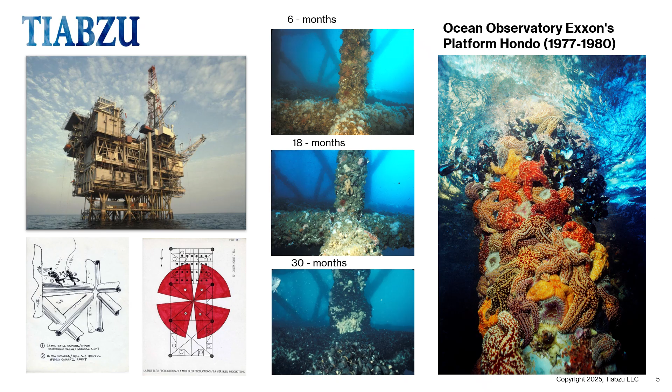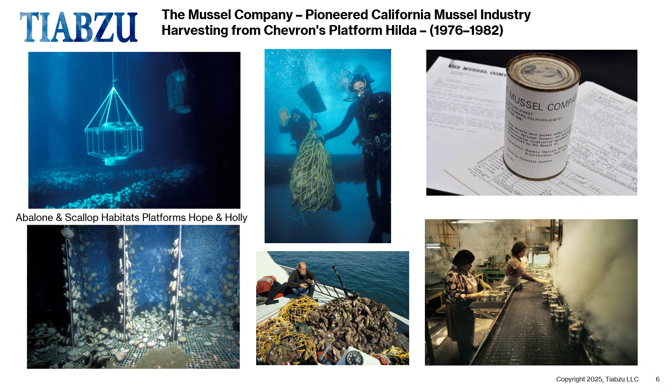Watching a reef form over time lapse, we could add up the benefits of this valuable resource. In 1983, with a Saltonstall-Kennedy matching grant from NOAA, my team, the Mussel Company, successfully harvested and canned mussels, demonstrating the commercial viability of repurposing offshore infrastructure for aquaculture. Atlantic Richfield funded Man-Made Oasis, a multimedia presentation showcased at the Cabrillo Marine Aquarium in Los Angeles for decades. It introduced the world to offshore platforms as artificial reefs, sparking new perspectives on their ecological benefits and alternative uses.

In 2015, Santa Barbara was in the midst of a severe drought. I was reading about the restart of the local community desal plant. I understood the process and its history.

I wondered, why not operate subsea and use the natural pressure of the ocean for desalination? This would reduce energy demands and the environmental impact.

As much as 40% of the energy costs for desalination is not only for reverse osmosis, but also to power the high-pressure, high-flow pumps that move as much as 5 times the amount of seawater as freshwater through intake and pretreatment. Pre-osmotic filtering removes marine life and coastal particulate matter from the seawater.

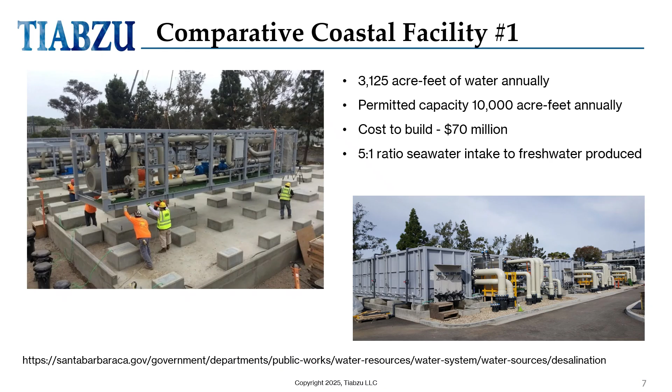The residual brine concentrate is not only saline-rich, but also includes the remains of this biomass. This biochemical cocktail is discharged back into sensitive coastal waters. Phytoplankton is among the marine life entrained by intake and impacted by brine discharge.

Phytoplankton concentrates along coastal zones. It is the base of the aquatic food chain and a primary source of more than half of the oxygen on the planet, releasing more O2 than all plants on land combined.

Phytoplankton also absorbs CO2, which is delivered to the deep ocean depths when the life that feeds upon the carbon-rich phytoplankton descends. This is part of diel vertical migration, a natural carbon sequestration that cycles from surface to a depth of 900 feet every 24 hours.

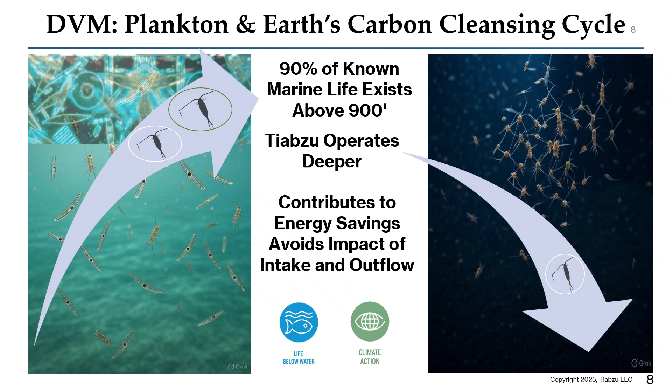DVM is a planetary climate regulating process that can be adversely impacted by nearshore seawater intake and discharge.

Operating subsea, high-pressure, high-flow pumps are required only for delivery of purified water from depth to surface or shore. Pumping only the product, the purified water, and not the product source, the seawater, lowers overall energy requirements by as much as 40%. Contributing to energy savings is removing multi-pump pre-osmosis by operating below the ocean's most biologically productive zone.

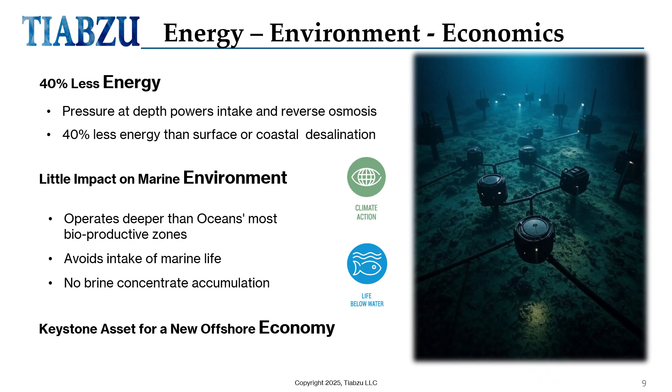Contemplated depths avoid the impact of desalination on phytoplankton, the marine carbon cycle, and potential negative feedback on climate perturbation that these systems can cause.

And no one wants one of these obstructing the ocean view from their Malibu estate.

Approximately 50% of the implementation costs for the Carlsbad, California facility is attributed to the regulatory process and mitigation efforts. NIMBY delays implementation for years and chalks up hundreds of millions in front-end costs.

The assumption is that the removal of the environmental impacts from intake and discharge, as well as competition with high-value coastal real estate, will lower that price tag.

We pulled in our favorite engineer, Ryan Elliott. We hired a team of process, structural, mechanical, chemical, and reverse osmosis engineers at IDI in Knoxville, Tennessee, to design the Tiabzu system.

Hi, I'm Ryan Elliott, mechanical ocean engineer, diver, and licensed professional engineer. I began working with Bob and Suzanne on various projects while in commercial dive school and continued while studying mechanical engineering at Cal Poly San Luis Obispo.

Our collaborations continued after graduation while I worked for other companies on various ocean engineering projects, including subsea power infrastructure, ocean observatories, and subsea sensors for the United States, the United Nations Nuclear Test Ban Treaty Organization, and other customers.

I also participated in the installation of these projects as a diver, deckhand, or equipment operator, in addition to the engineering, testing, and equipment assembly phases, giving valuable field experience to incorporate into subsequent designs.

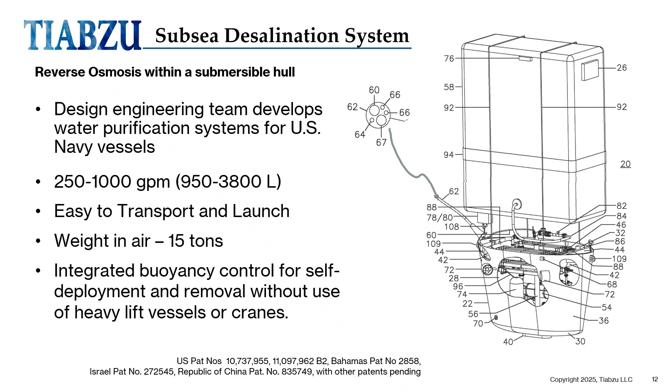This buoyancy system integration is used to facilitate deployment, recovery for maintenance or at end of life, or to position and maintain it at operational depth during mobile operations. For scaled water harvesting fields, the module keel will mate with subsea infrastructure.

The Tiabzu system includes an integrated buoyancy control system analogous to a hot air balloon. Using difference in density between hot internal air and cool external air for its lift, its balloon or bladder provides lift using the approximate 3% difference in relative density between the RO water and seawater. RO water buoyancy allows safe vertical movement of subsea objects without change in lifting force with depth associated with gas-based methods where buoyant force varies with changes in pressure.

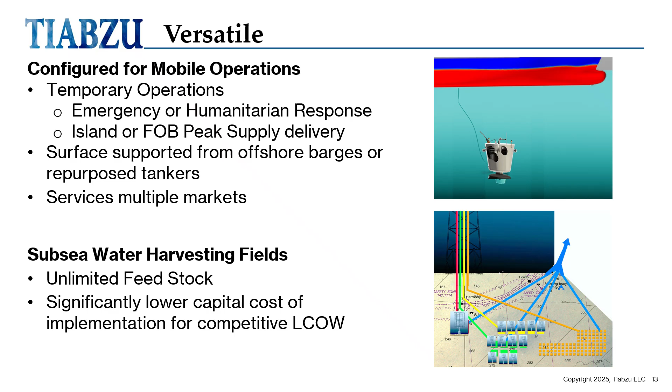I'm Dr. Andrea Neal. I'm the president and founder of Blue Capital. I met Bob and Suzanne back in the day when I was working with Jean-Michel Cousteau and working heavily as a scientific diver. Over the last 20 years, I've led major expeditions across the Atlantic and the Pacific and throughout the Sargasso Sea, as well as accomplished many feats in the waste-to-energy industry, including large-scale industrial production of waste-to-energy facilities.

Today, we're going to go through some of the things about Tiabzu, objectives, pilot scale, and replication of the project. The plan is to deploy a commercial scale system next to a platform and conduct a pilot for a minimum of 6 months to confirm predicted operational efficiencies, energy, environmental, and economic outcomes to de-risk the project for financing and performance insurance. This de-risking step allows for easier project finance capacity for industrial, commercial, and government clients to include the Tiabzu system in water supply portfolios.

The first stage of the pilot will be to saddle a remote operating vehicle with a small-scale desalination system. The ROV will carry the system to its operational depth and run through the paces to demonstrate system efficacy, operational hours for insurability, and using the generated freshwater as a form of buoyancy for recovering and positioning the module.

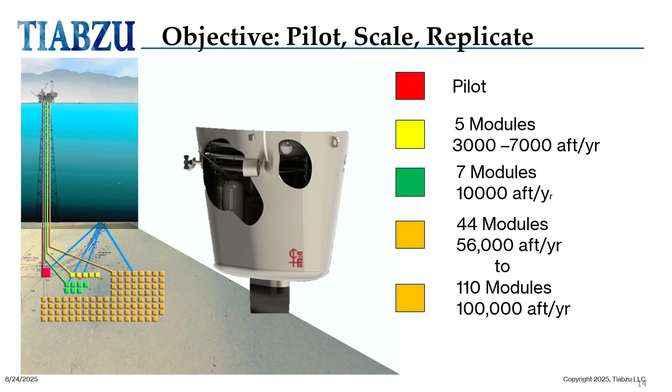Hi, this is Mike Edwards. My oil and gas career spanned 4 decades, beginning as a field landman before various promotions where I worked in acquisitions, legal, government relations, community and public relations, and finally in investor relations. Besides many years living and working in Santa Barbara, I spent a considerable time on boats in the channel going to and from platforms. I was also very fortunate to join the UCSB Marine Research Team in a 2-person mini sub and saw the abundant sea life on and at the bottom of Platform Gail in 740 feet of water.

Approach the repurposing of offshore infrastructure as a collaborative process, working together with owner-operators, leveraging their assets, and having a positive impact on their bottom line. The Tiabzu system is designed to operate independently without any interference with platform operations. The system is cross-supportive with power supplied from the platform and fresh water supplied to owner-operators.

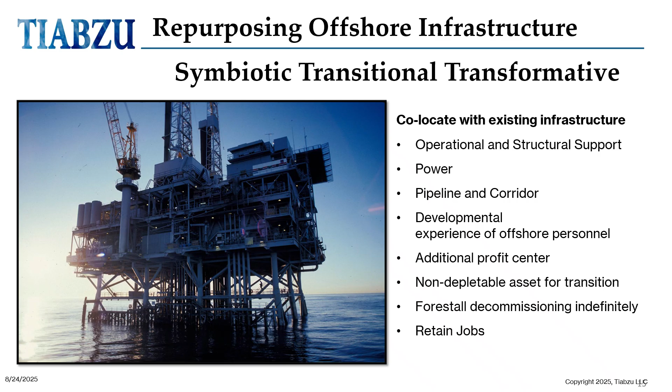This symbiotic relationship establishes a framework for development and regulation for long-term uses. This alternative use for the offshore infrastructure provides a transition as conventional productivity declines. And in the case of Tiabzu, as alternative energy sources come online, the possibility of keeping the assets productive for a longer period. This transformation can create a new and sustainable offshore economy.

We use California for economic modeling because it is home to most of our team and where we're most familiar. It has a clearly identified need, multiple sites with suitable bathymetry for post-pilot scaling at required depths, and near-site existing infrastructure. Since it is also one of the most regulatory restrictive and expensive locations to implement and operate, we believe our predicted returns are relatively conservative. Frankly, if this can be done in California, it can be done anywhere.

We have identified and will continue to source other locations globally and invite input. We have patents issued in strategic regions internationally. Levelized cost of water, the LCOW, is used as a standard performance metric, and we use those suggested by Sandia National Laboratories. We added DT, development, to the initial capital costs to account for the project's iterative stage. We are looking forward to seeing how these values hold when updated using Dr. Seetharam's techno-financial modeling here at ROICE.

The basis was an initial bill of materials for the pilot and energy required for mean output of 500 gallons per minute, which is the pump chosen during concept design. Pump range is 250 to 1,000 gallons per minute. As we scale, we shift the pump output to the maximum volume of 1,000 gallons per minute, as adjusted by an 85% operational efficiency. Dependent variables are module scale, number of modules, operational efficiency, and site-specific power source. The excess power capacity available at one of our modeling sites supports scaling to 100,000 acre-feet per year.

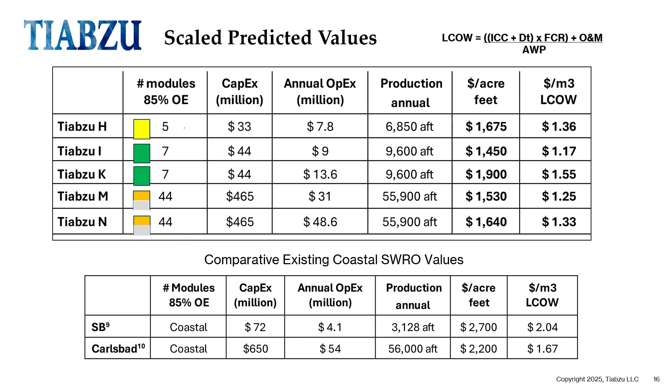Pump choice and energy requirement has since changed positively for the bottom line, but we kept initial feasibility values since for our purposes, conservative outcomes are preferred. Our financial models predict a doubling of profits within 5 years of approvals to scale up operations. Subsea Desalination produces high returns despite a low commodity price, less than 37 cents a barrel, as compared to oil at $70 per barrel or natural gas at $40 per barrel of oil equivalent. That price difference is offset by higher production volume of a non-depletable resource, plenty of seawater, coupled with lower energy costs and the efficient design of the Tiabzu system for low capex and its ongoing effect on the LCOW. Co-development provides the framework for regulatory or independent operations before momentum for decommissioning takes over.

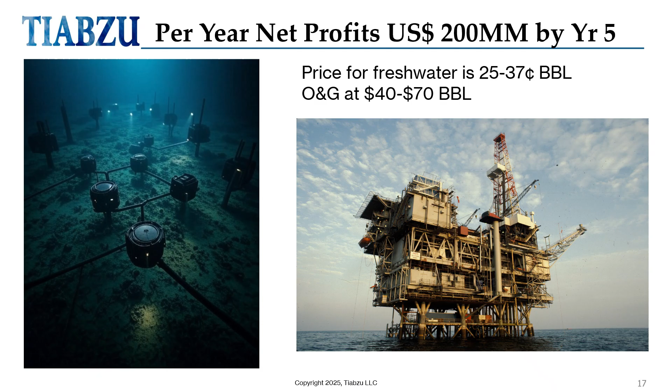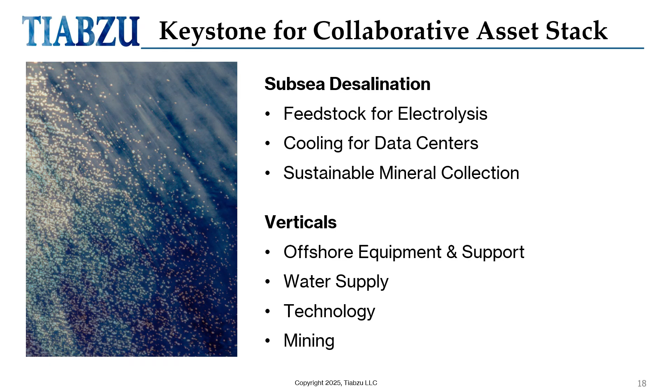The alternative use provides the non-depletable assets for transitions as oil and gas productivity depletes and as other energy sources, wind, solar, hydrogen, wave, come online. It doesn't have to stop here. As the ROICE model reveals, stacking collaborative assets increases profitability of repurposing. And subsea desalination is a keystone asset. It is cross-supportive of offshore oil and gas. It is also in line to support a variety of other uses. Feedstock for electrolysis, on schedule for discussion this afternoon, cooling of data centers, green hydrogen, or our favorite, sustainable mining of ocean water for minerals.

Hi, I'm Dan Tormey, Managing Director of Catalyst Environmental Solutions. I'm an internationally recognized environmental expert with a PhD in geochemistry from MIT and a BS in civil engineering from Stanford. Over the past few decades, I've worked across sectors, from founding a 40-person consultancy in California to serving on the board of an Australian circular economy startup. I also maintain an active research program in volcanology and have long-standing involvement in nature conservation. Today, I'm excited to share how our work is advancing the frontier of sustainable resource recovery from the ocean.

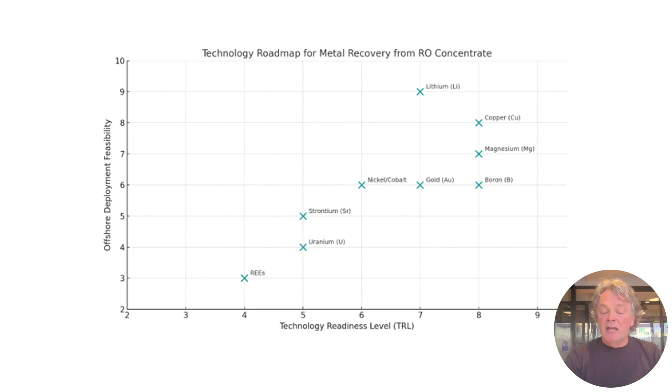Offshore platforms, some already built, can be repurposed into hubs of circular production, clean water, green hydrogen, and critical minerals, all from seawater. This isn't a pipe dream, it's a platform for the future. Let's unlock the hidden value in seawater together.

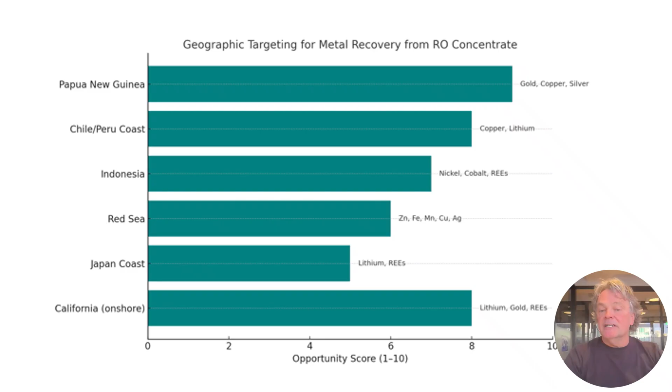There are real benefits to subsea desalination. Energy and environment can be attributed to the operational setting. The real challenge is economic, and the solutions are the same for most, if not every, subsea development. Paramount is how to get equipment through the water column down deep, operate and maintain in this remote environment, and how to bring equipment back up when required, whether for maintenance or at end of life.

A key factor is how to handle variable pressures, which comes down to buoyancy control. Methods currently used for deployment and removal are lift vessels and cranes and airlift bags. Heavy lift equipment is expensive and limited in availability, particularly in places like California, which is outside the concentrated offshore oil and gas activity, such as in the Gulf of America, North or China Seas.

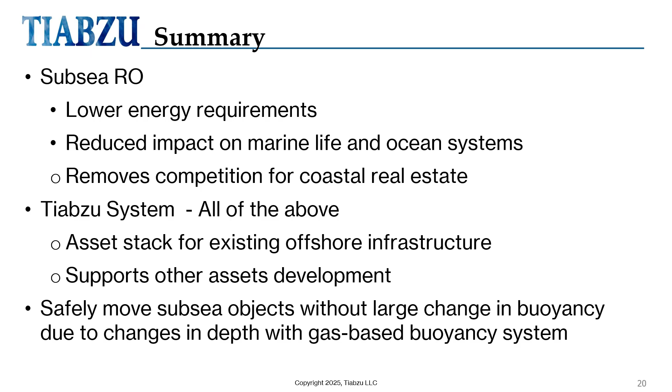Air or gas-filled bags are sensitive to changes in pressure. Freshwater is safer, more stable than gas-filled bags, and is much less expensive than heavy lift vessels when processed and filled on site and at depth using the Tiabzu system. Subsea, surface, and umbilical are the major systems of Tiabzu.

The subsea system is composed of the RO, maneuvering, power and telemetry, and control subsystems. The reverse osmosis subsystem generates purified water from seawater using reverse osmosis membranes bundled in housings. The next slide describes this system in more detail.

The maneuvering system carries the subsea system to operational depths and maintains system depth using a patented purified water buoyancy system. The maneuvering system contains a large bladder of fresh water, providing fine buoyancy control using the difference in density between seawater and freshwater. Overall system buoyancy, positive, up, neutral, stationary, or negative, down, is controlled by changing the volume of purified water in the bladder. Small changes in buoyancy are possible, allowing precision control and safe movement between operational depth and the surface.

Purified water from the RO system is either sent to the surface or sent to the bladder to increase positive buoyancy. Fresh water is released from the bladder to decrease buoyancy. Thrusters allow lateral motion of the subsea system.

The telemetry and control system contains the command and control systems for RO and pumps, control of lateral thrusters, and status of all systems. Data from instruments will be transmitted to the surface by the telemetry system, including water quality, depth, heading, environmental conditions, and any other qualities determined necessary.

The power distribution system to pumps, thrusters, and valves is directed by the control system and will likely occur in a separate pressure vessel to minimize noise issues and better address thermal management. Power transmission from surface to subsea will likely occur at higher voltages and require conversion to usable voltages.

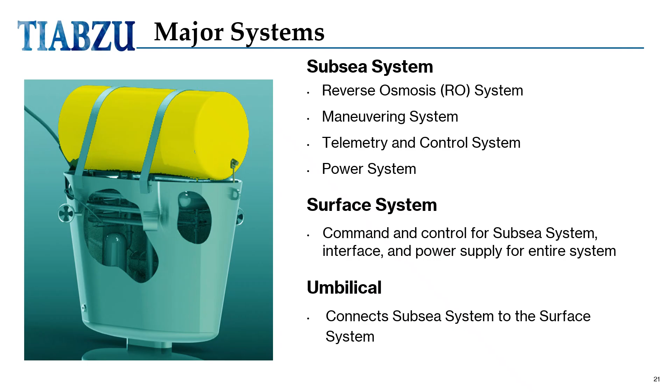Key components of the Subsea Tiabzu RO system module are the RO membranes, membrane flush pump, extraction pump, and RO water receiving tank. The umbilical contains a snorkel or vent line connecting the RO water receiving tank to the surface, maintaining the RO water receiving tank's internal pressure at surface atmospheric pressure. The produced water side of the membranes are connected to this receiving tank. The difference between surface and ambient pressure drives water through the RO membranes into the receiving tank.

A low-pressure membrane flush pump ensures a fresh supply of seawater surrounds the RO membranes and helps disperse the higher salinity discharge from the system. An extraction pump draws purified water from the receiving tank and pumps it to the surface or shore, or, with the switch of a valve, into a bladder to add to the subsea system's buoyancy.

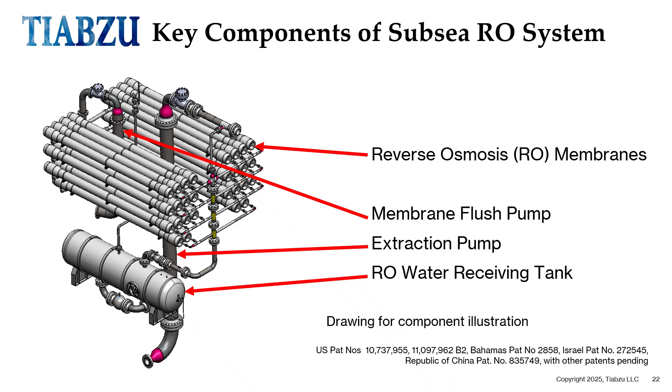An air-based ballast system is used during initial deployment. Once at operational depth, the RO buoyancy system is used for recovery for maintenance or at end of life, or to position and maintain it at operational depth during mobile operations. For seabed operation, the module will be negatively buoyant when the bladder is emptied, allowing the keel to rest on the seafloor or mating subsea infrastructure and resist disturbance or motion.

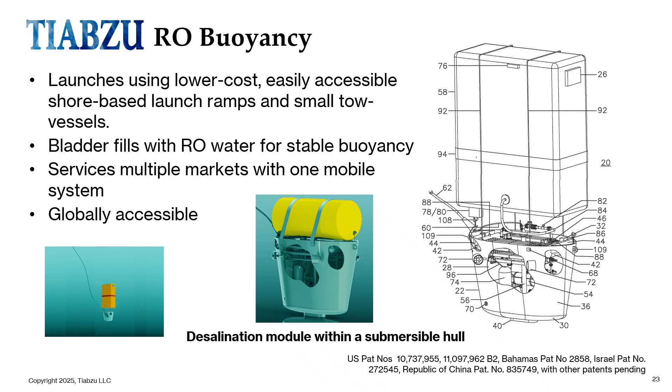This patented system integration is expected to significantly lower capital costs associated with implementation and address regulatory requirements for removal at end of equipment life.